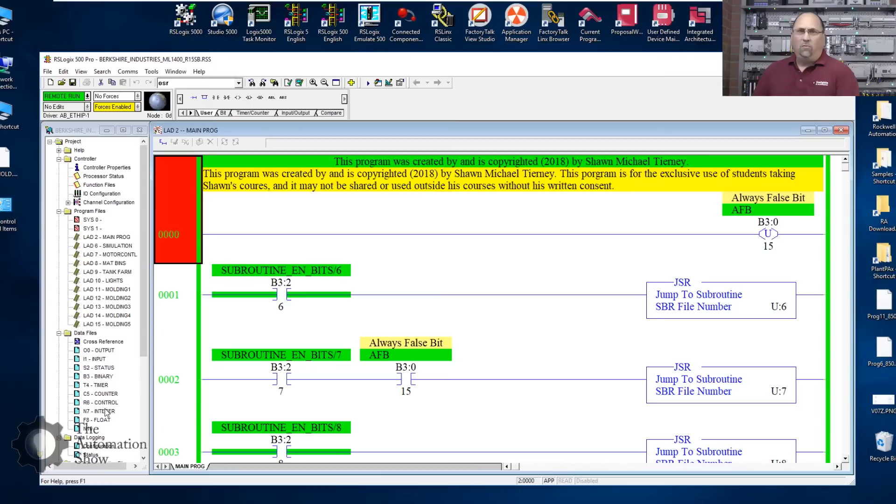But in any case, let me show you the data that we're looking for here in the MicroLogix, SLC-500, PLC5. They all have the same programs in it, and the data is in N750 through N799. So this is our molding information here. N750 through 59 is molding 1. Now this data is actually what I use in my Factory Talk View SE course, and I'll be building on that as we release new courses in 2020 and extend and grow the existing courses.

That's why I've invested so much time into this program and have it in all the controllers, because I've done most of it for View SE, and now I just have to go in there and make things happen automatically and kind of randomly for the PLCs to have some data that they can read that's not all the same.

So here you can see I get some speeds here that are changing, and I get some other data here too. So we're just going to read N750 through, we'll just read 50 integers. Now these are integers because it's a SLC-500 or a MicroLogix, not double integers, right? So we're going to read these into the ControlLogix across DH-485.

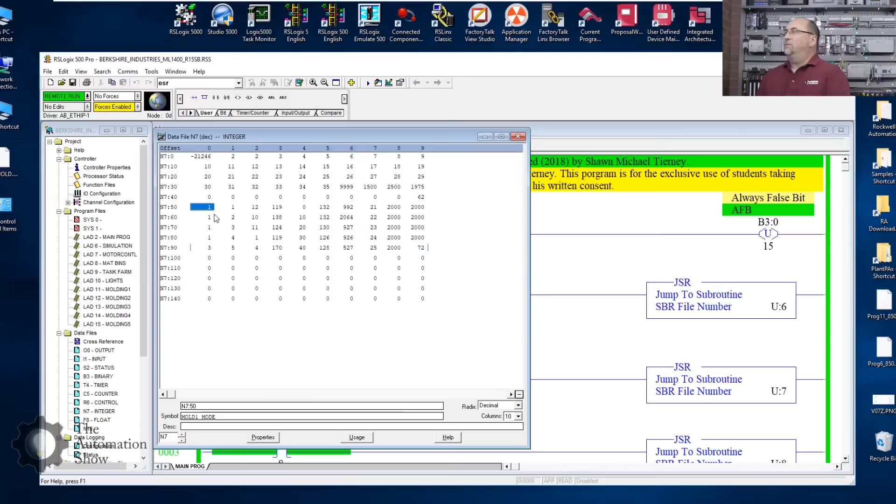Again, we've done messages across other networks in the past on the show, but I figured, hey, we just got the DH-485 set up, and that's the network that the 1000 and the 1200 and 1500 have natively, so it'd be a great way to try that out. So that's what we're going for, N750, okay? Let me get this program up, and we can try to do this all online. Why not, right?

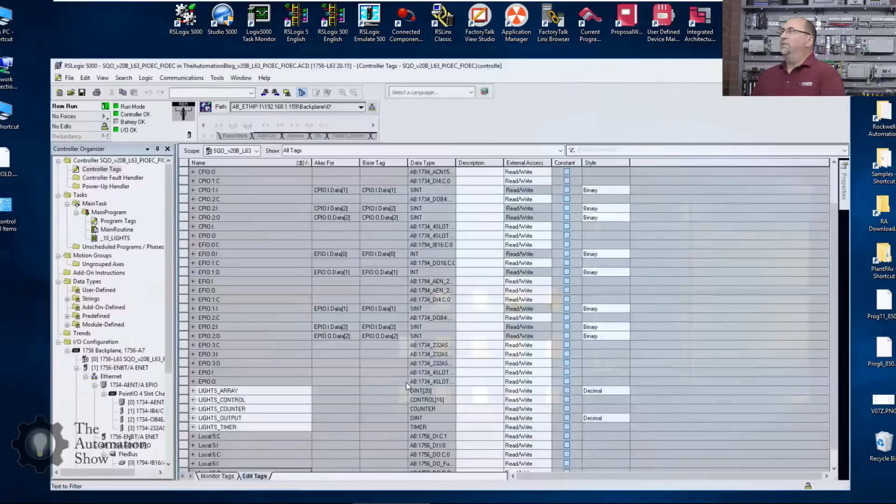So I'm going to go into my program. This is the ControlLogix, I'll bring that up in a second. That was the L23, let me bring up... that's the one I just had up. How about this one? Okay yes, this is the one we've been using in the automation show.

So let's go to the lights routine, and I'm just going to come down here and add a new rung.

Here what I'm going to do is start by triggering my messages with a timer. You might ask why you're doing that. Well, we're going out the serial port of the L63.

If you didn't watch the last show, that's how I'm connecting to the L63 to the DH-485. I don't have one of those DH-485 bridge modules. They weren't very popular, not really available secondhand anywhere at a reasonable price, and they weren't really used in industry very much. It's very rare to see a 1756 DH-485 module, mostly because they came out so late in the life cycle of DH-485.

But with that said, I'm going to use a timer because the serial port on the controller has a buffer. It can only send one message out at a time, and if you try to send 100 out, the buffer isn't 100 deep. The buffer is usually 10 to 15 messages on most Rockwell controllers, and any messages received after that just get thrown away.

So I don't want to fill up the buffer by doing a bunch of messages super fast. What I'm going to do is cascade them together. We'll start by triggering the first message with a timer. So here I'm just going to do an XIO and a TON, put that in here, and make a new timer. We'll call this the message timer.

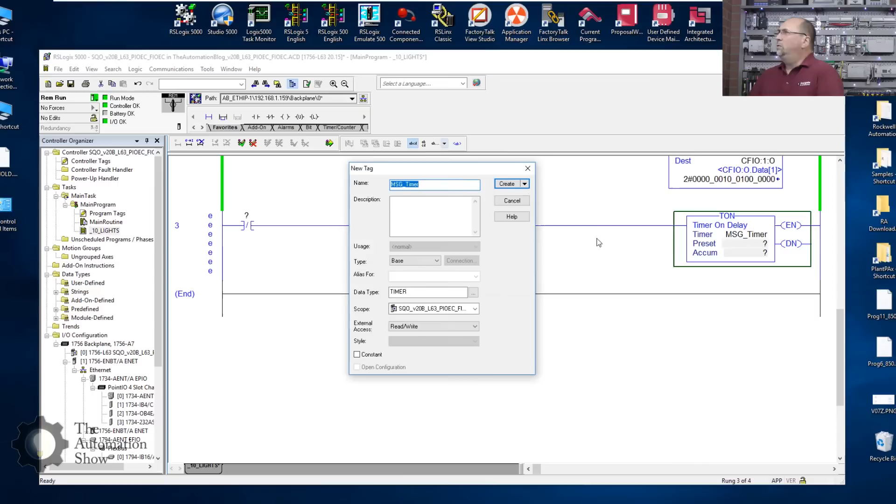Okay, we'll go ahead and create a new timer. That all looks good, and I'm going to give it a preset of I think 3 seconds. I did a little testing here beforehand and 3 seconds seemed to be really good. Then I need to bring this over here and put the done bit on this, so this is a free running or self-resetting timer. If we accept that, we should see it going and just going and going like the Energizer Bunny.

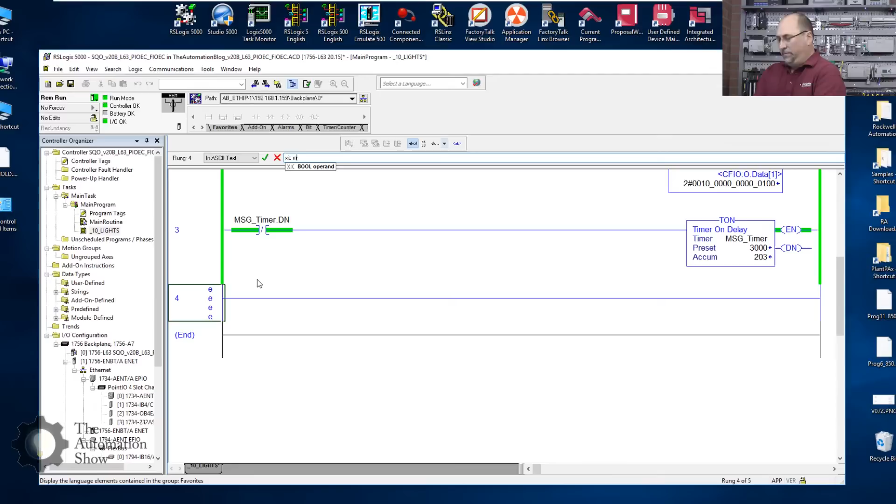Okay, so now we'll add another rung, and this is going to be the message. I'm going to just do an XIC MSG and we'll use that same done bit here. Then we're going to do multiple messages.

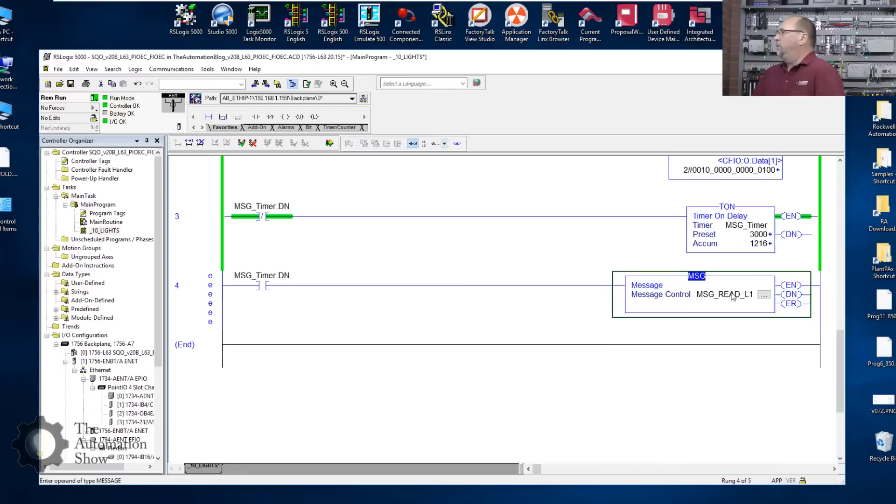For the control world, I'll just do, let's see, message underscore, we're going to be reading because this is a data concentrator type application. Message underscore read underscore, let me do L1 for legacy 1. Okay, new, create. Okay, now let's go in here.

Now we're reading from, I'm going to start by reading from the SLCs and the micros. So let's go down here and do an SLC type of read. Okay, now we know the source is going to be N7:50, and I said I wanted 50 words. The destination, we've got to make a destination tag.

I don't have one, so I'm going to do, let's see, we're going to do MSG, read L1 data. How's that? We're going to create new. Now remember, because there are integers coming in, I want to make these integers too. I want everything to line up, right? So I'm going to make it int, and I need 50 of them, so we'll make an array of 50. I'm making everything controller tags, so let's go ahead and create that.

Okay, the second part, now this can be the most confusing part, is what is this path? Now if you're going across Ethernet, you can actually browse and select what you want to read from. But how do you do it if you can't select? Like, I can't browse because I don't have a DH-485 bridge module. I can't actually browse the DH-485 using the browse button, right? So how am I going to do this?

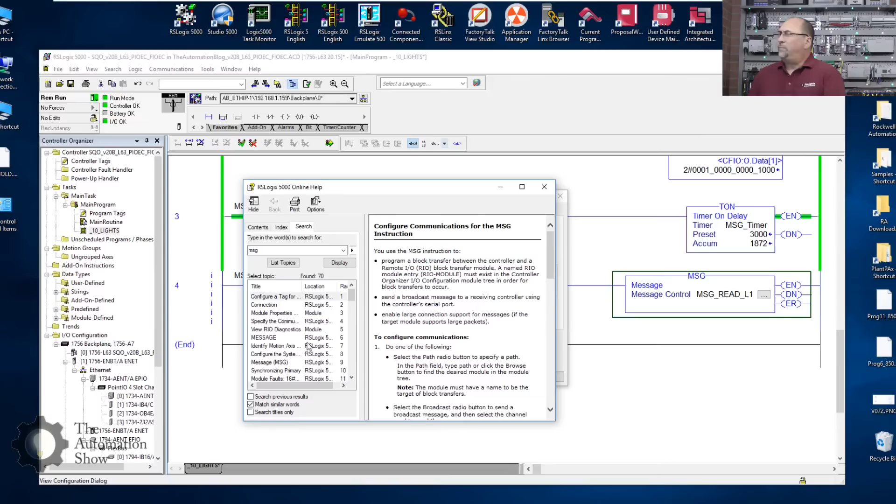Well, we always go to the help file, and I've had a lot of people ask this over the years since the late 90s when the product first came out, Logix. And the help file is great. Just go over here to search on message, okay? And then in here, somewhere, specify the communication path, okay?

So I'll come down here and you can see, okay, so the first thing is going to be the port. And the first thing we want is port 2, because that's for the DF1, channel 0. The back plane is 1, and the serial port is 2, and we're using the serial port. So we'll use port 2.

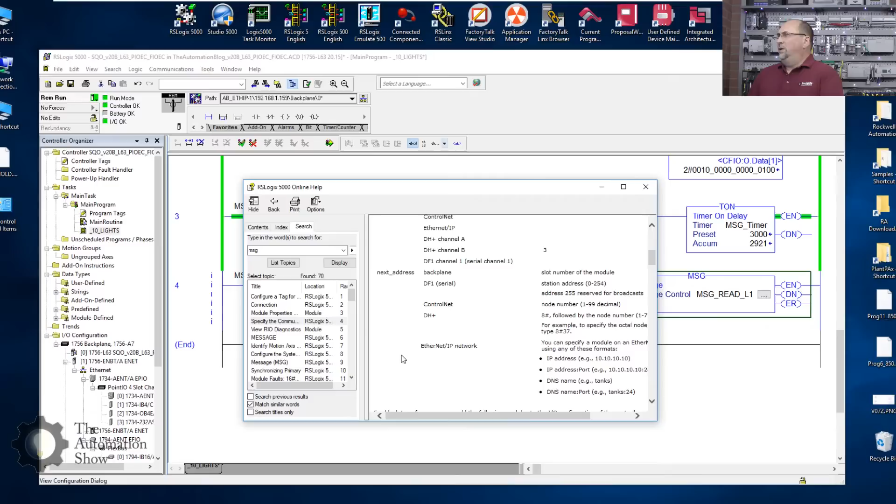And then after that, the next thing will be the address. So let's see here, we're going to do 2, comma, and if we do the SLC-500, is the SLC-500 working? If you can see over here, I know it's hard to see, I don't have the overhead camera pointed at it, but you can see that the lights are flashing on and off, so that means the molding program is running. So we'll just put 3, because that's address 3.

We can double check that inside of Linx here. Okay, everything should be good. So 2 for the serial port on the controller itself, and then 3 for the address on the network I want to talk to. Now, if you were going through multiple bridges, for instance if you were going out the Ethernet card, you would have to put the slot of the card first, then the port on the card you wanted to go out, then the address, or maybe the IP address of what you wanted to talk to, and then the device in that remote rack. So that string can get pretty long.

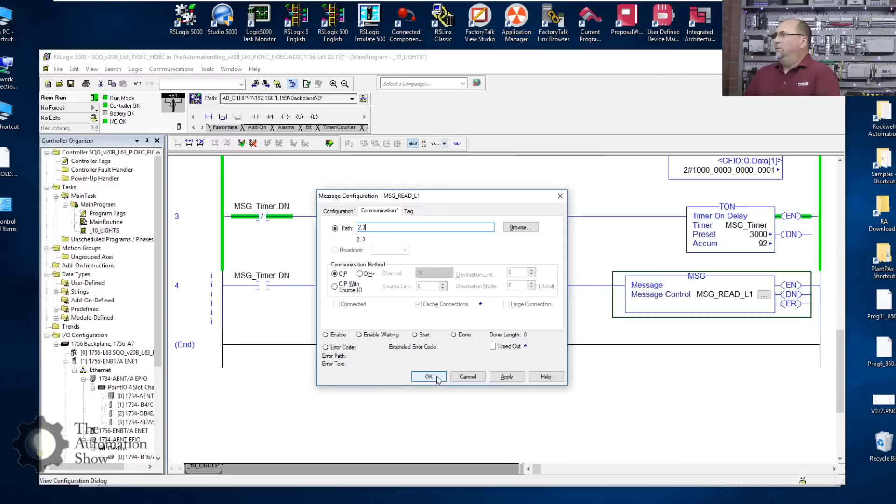And again, on Ethernet it's very easy because you can just browse for it if you're live on the network. Okay, so that seems right, I'm going to hit OK. Who knows, let's just run it. Hey, we're working on the bench here, right? We can try this stuff.

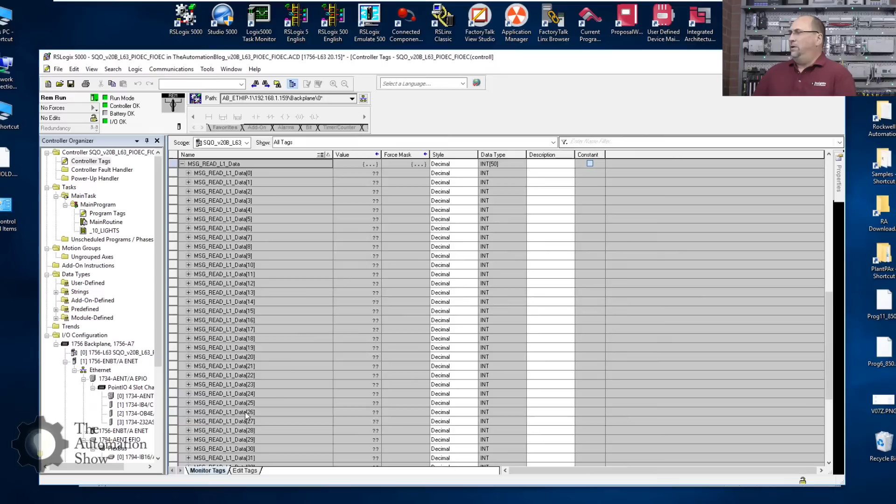Okay, it went enable done really quick. Enable done, I think we're on to something here. Let's go ahead and check our controller tags, go to monitor. That was message 1. Let's see, read data. Okay, yeah, we can see data coming in every 3 seconds from our 503.

And how do we prove it's our 503? Well, we could always unplug the 503, right? Let's see if I can get them both up here on the same screen. Okay, yep, new data came in. New data came in. So this value seems to be changing every time.

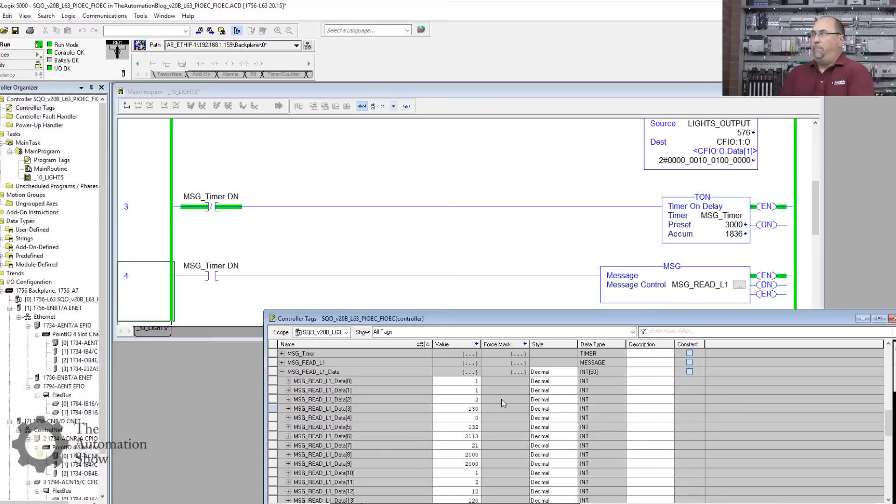So let's go ahead and unplug the 503 from the DH-485 network. Let's see if I can do this without disconnecting everything else. Okay, I do have the AIC powered from the power pins on the bottom, so unplugging the controller doesn't de-energize the AIC.

And now, ooh, look at that. Matter of fact, I'm going to make this longer here, let's make it 10 seconds, because I've never seen it go done. It's probably timing out. Yeah, see, it's timing out. If I make this 20 seconds, we'll be able to see that.

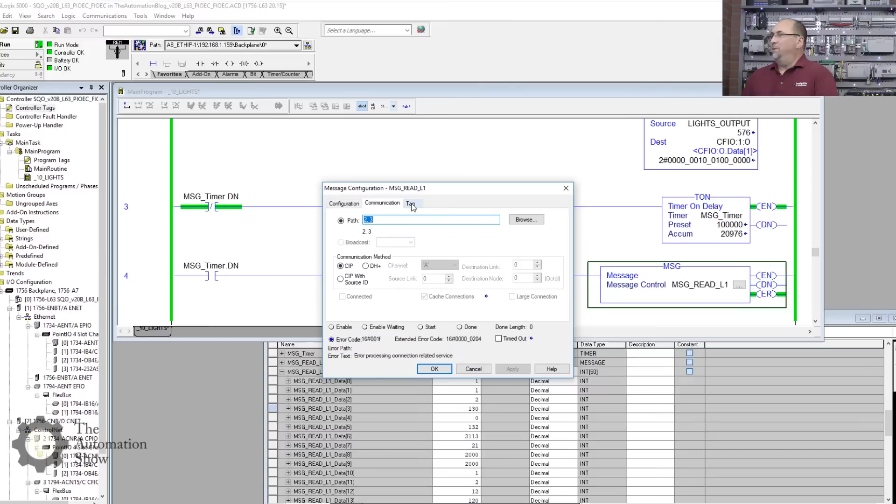Let's see what this error is. Come on, give me an error. Wow, okay. Let's make this really big number here. Okay, error processing connection related service. Here's our error codes and everything. So not a lot of information there, except if you look that error up, it'd probably say, hey, can't connect to your remote device.

All right, well let's put this back down to 3 seconds. And let's plug her back in. Try not to knock anything over. Okay, she should be back in. Let's see if we can start getting data again.

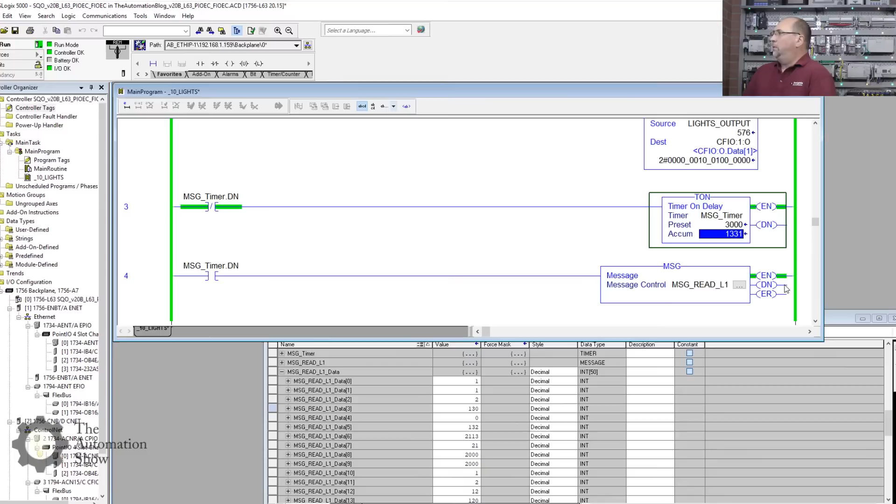Okay, there it just went, enable done. I think we still have some messages in the queue it's trying to complete. Enable done, okay, so it's working again.

All right, great, now we want to do another message, let's do it to the 1000. We're going to do the very same thing, but this time we're not going to use the timer to trigger both of them at the same time. We could, but we're actually going to use the first one being done or errored to trigger the second one, so we get a kind of a cascade going.

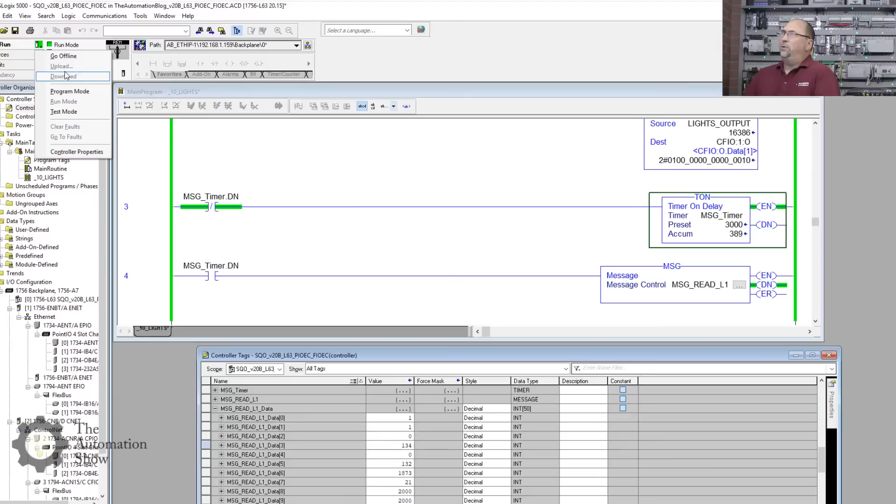And just for the sake of time, I'm going to put this guy in the program mode. Okay, yep, we'll go down and make this bigger. And so let me put a start rung, edits, I'll put a branch in here. Okay, and I'm going to just copy this. You know, if we could probably do, let's see, I have 4 micros, right? 1, 2, 3, 4. Hopefully this doesn't become too tedious.

Let's see here, 3, 4, this will be L2, L3, L4, L5. Okay, and this will be, oops, now we gotta make them all message, message, message, message.

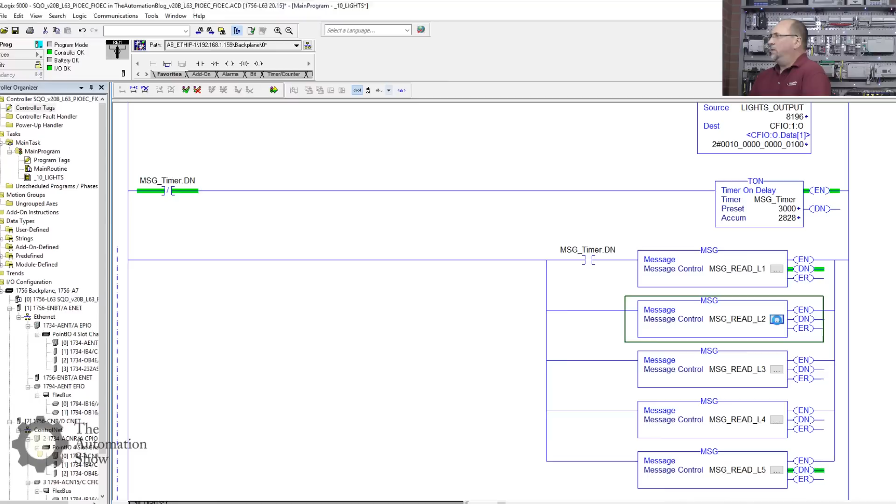Okay, SLC typed read, N7... 50 elements, and the destination will be MSG read L2 data. Okay, the path will be 2 for the serial port, and then we're going to go to address 10 now, that's the 1000. Okay, so we can apply that. It says, oh, you never created that, let's go ahead and create it. Again, we want it to be an int of 50, dimension of 50, so we'll create that. Now we'll try apply it.

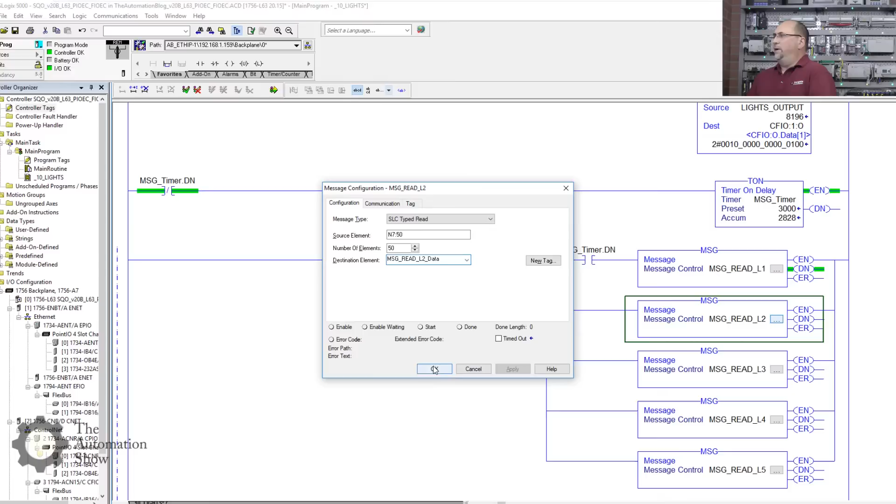Okay, good, so let me do these next 3. I'll speed up the video.

Okay, I've done my 4 additional message instructions. Now I want to trigger them based on the success or failure of the message before it. So let's start with success here. We'll put a XIC in there, and here, and here, and here. This will be if L1 is done, then trigger L2. And then if L2 is done, trigger L3, and so on.

Now, the only problem in doing this is that if your timeouts are really long, you'll be really slowing down updates of everything. So this is where you may want to change your timeouts to be like maybe a second. Remember the timeouts for the read we were doing when we unplugged this 503? It was a pretty long timeout. I had to adjust the timer all the way up to 100 seconds just to get it to error out.

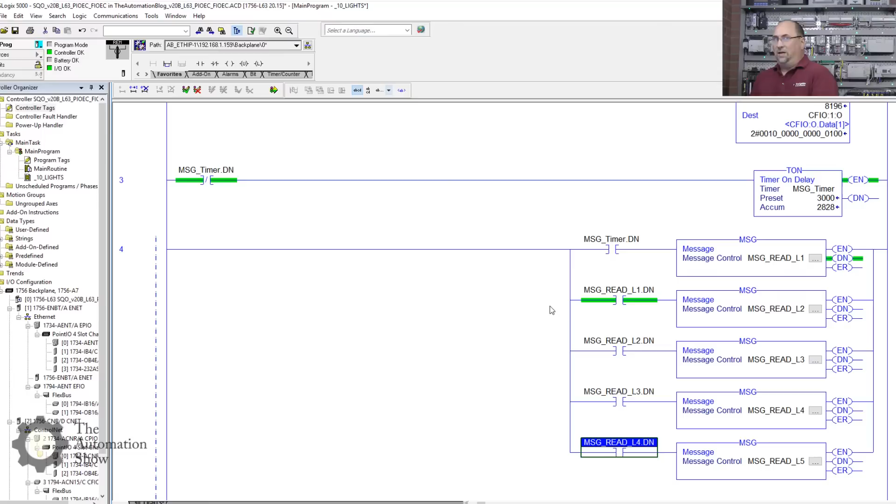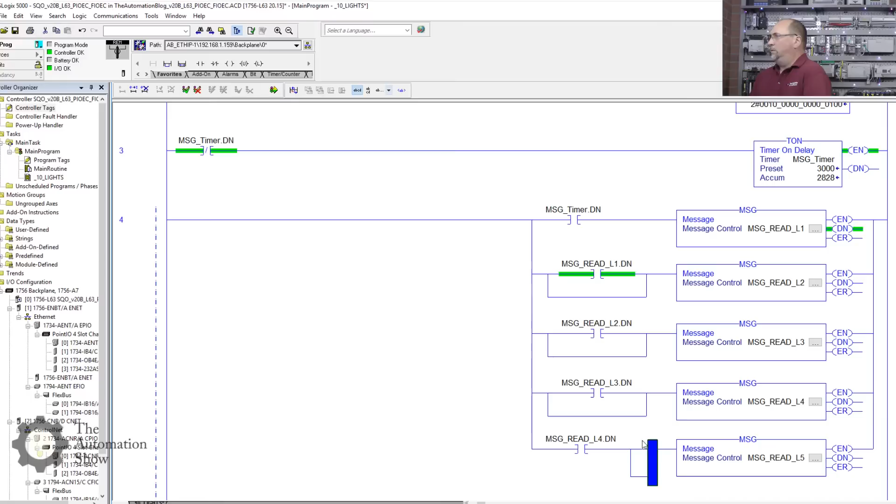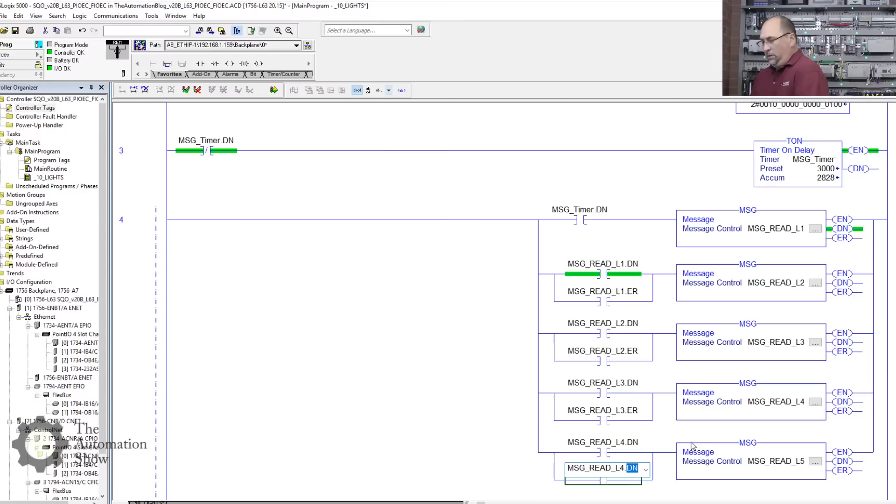So we don't want to just do the done bit. We also want to do the error bit too, because if the message has an error, we also want to go on to the next message. So let me put 4 branches in here, and we will control and drag to copy. And so this will be ER, ER, ER, and finally ER. All right.

Let's accept that, see if it's good. Looks good. Let's try it out. Let's put it back in run mode. See what happens. You see that? It went boom, boom, boom, boom. And they're all completing successfully. The 1400 one went much faster than the other ones. It was the last MicroLogix to come out, right?

So let's go to our controller tags here, and we will check 2 data. Whoops, go to monitor here. That's 1 data. We want L2. No, we don't want the message block. We want the data. Here we go. So these would be the molding machines that the 1000 is controlling. And we can come down here and look at L3, L4, and L5. Each machine has 5 molding machines. Just look up here. Yep, got a change there. Yep, that one's changing. So we're getting all our data from our different controllers.

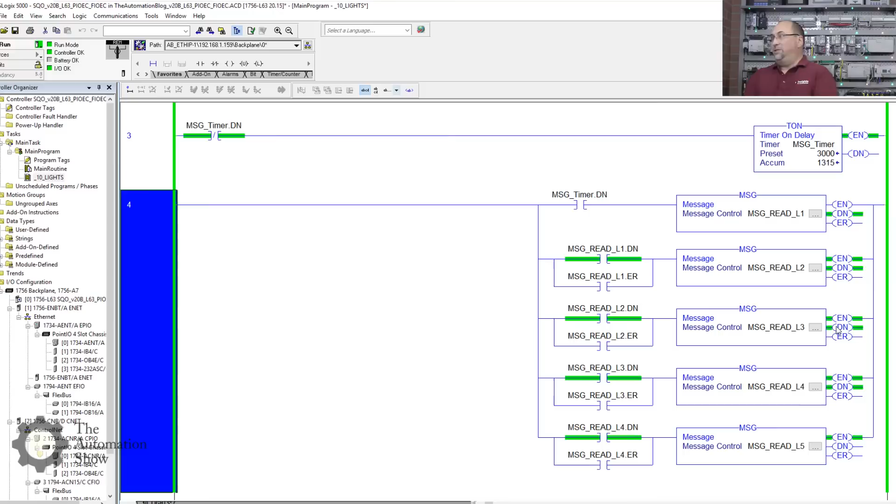Another reason why I've gone to sites where people had PLC5s doing continuous messages to each other, and the data highway plus was so slow. It's like, if you just interlock these messages and stop trying to spam the network and filling it up, then you're going to get much faster response times. And even being as slow as DH-485 is, this is still pretty good. I'm reading 5 controllers across that network every 3 seconds.

I could probably go a little bit faster too. Let's see how long it takes. Yeah, I could probably do it in 2 seconds. Let's change the timer to 2 seconds. Yeah, it's finishing every time.

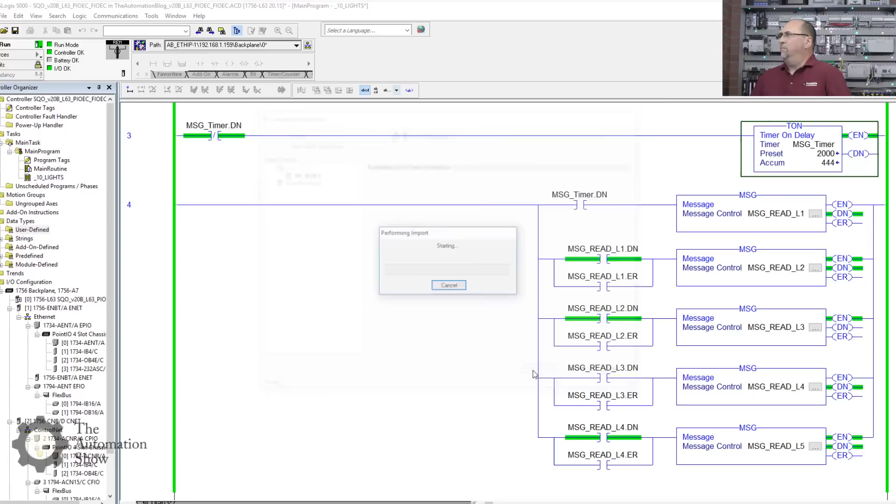Okay, I got it on my desktop here. I'm just going to say, yeah, bring it in as is. And we'll do the L23. So use the same rung here. Just going to extend the branch down. Okay, and I'm just going to, because this is, let me hold the control key, so we're adding that.

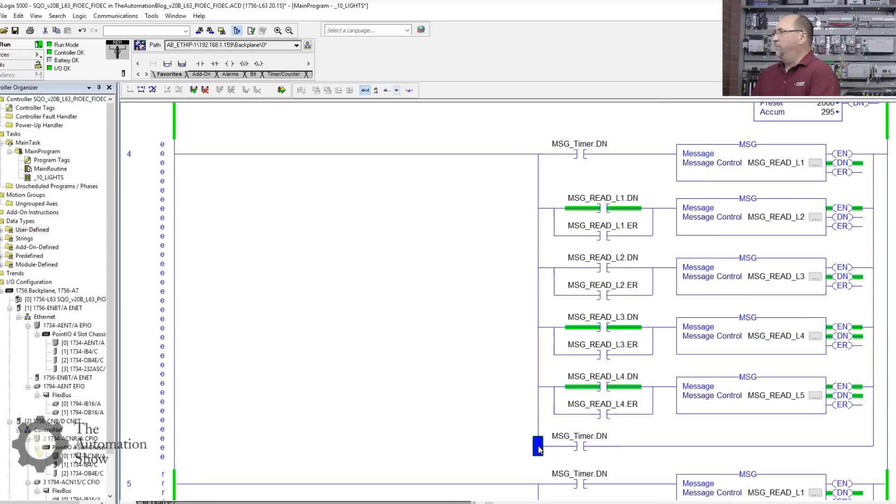Because this is a ControlLogix, I'm going to just use the timer again to trigger it. So we'll be triggering 2 messages at once. Okay, now my message instruction, let me just go ahead and type that in there. Okay, so MSG, put that in there. And we're going to call this MSG read. We'll call this CPX 23 for CompactLogix, and that's address 23.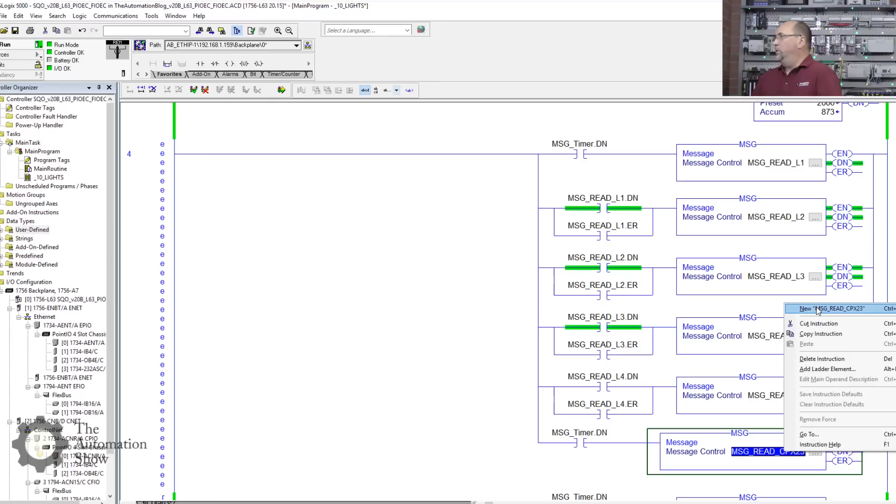So let me make a new one of those. Create. Let's go in here. I'm going to do a CIP data table read. In the source element, it's very easy. I just call the tag in my CompactLogix program, mold1. And I only need one element because it's a UDT. I'm going to read the whole UDT in.

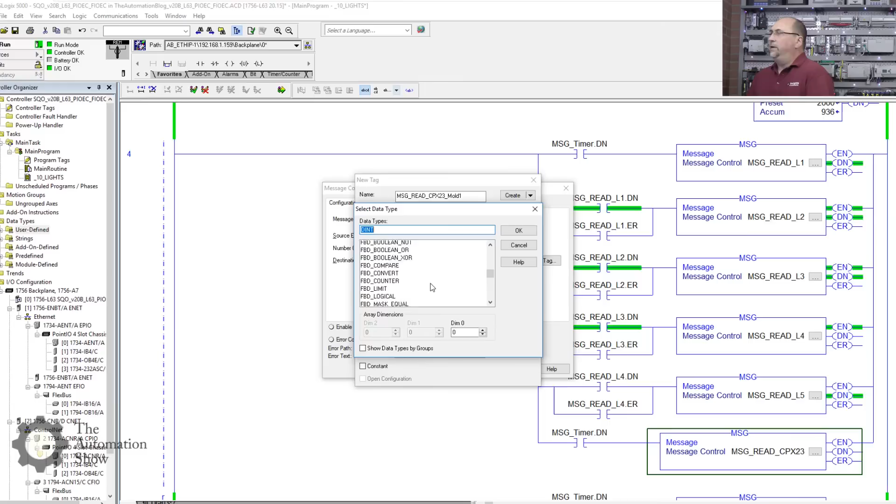And then my destination will be, let's see, we'll call it MSG read CPX 23, and I'm going to call it mold1. Okay, now we'll create that tag, and the data type has to be my new UDT. Let me see if I can find it. My insights and automation. There it is, mold. Okay, excellent. Create. Okay, good.

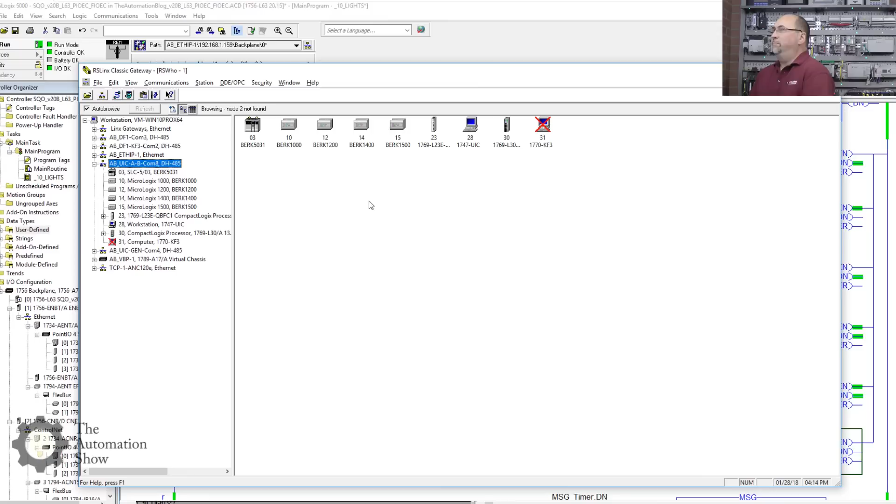Apply. Oh, I did got to do the path first. So what's the path? Same thing. 2 for the serial port, and then my L23. Just because I am an old guy, I made it very easy to remember. I made it address 23. So let me go back to here. So we'll do 2,23. Okay.

Did I make any typos? We're going to find out. Okay. Look at enable done, enable done. So that is supposedly working. Let's go ahead and look at our controller tags. Let's see here. Monitor. Come on, monitor.

Okay, here's mold 1, and there's only one mold here. Oh, you can see the data, it's updating.

Now we can prove that that is it, because I can put it in the program mode, and then the data will stop updating. 1, 2, 3. Yeah, it's not updating anymore. Now let me put it back in the run mode.

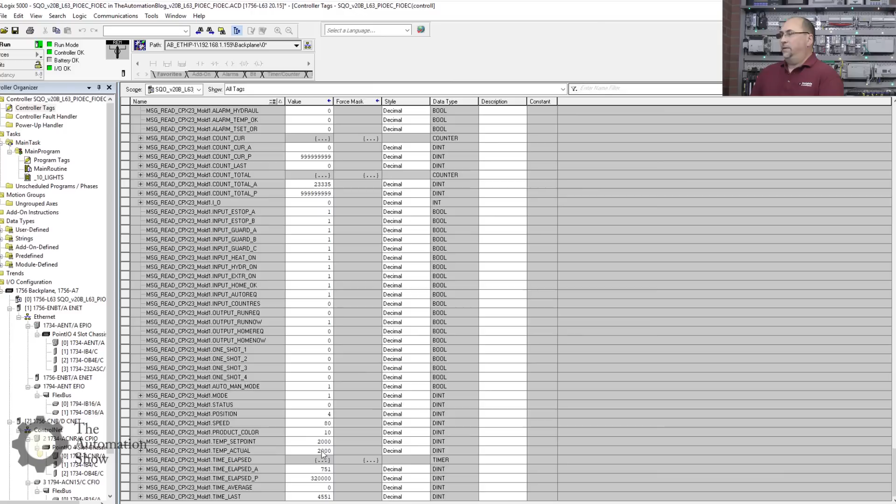Okay, and it should, yeah, see it updating? See these updating too?

So that is how you can utilize message instructions in your ControlLogix or CompactLogix, or really any PLC, to read data across the network as like a data concentrator. In this case, we're doing it across the DH-485 because that's the last thing I set up. But like I said, we've done other networks in previous episodes. And that's that—so one more part of the Studio B board done, which I'm happy about.

And I think I am going to leave the holiday lights up for a little while, because I just put them up, and it's almost Christmas. So I hate to have them only up for one show, but in any case, I want to thank you all for watching. Really appreciate you all.